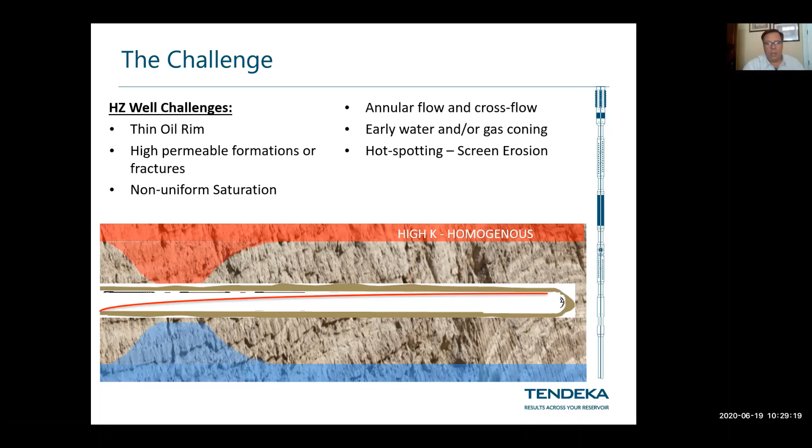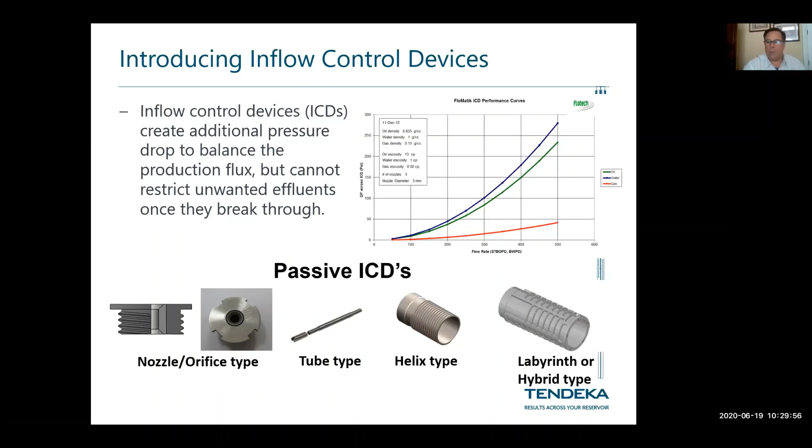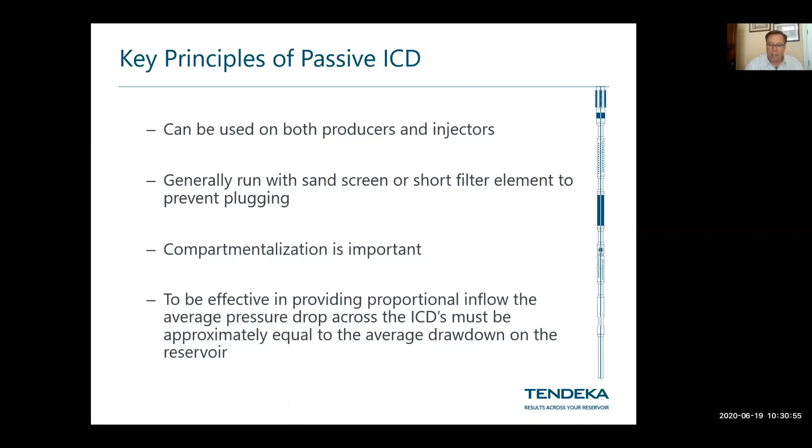So to be effective in providing proportional inflow, the average pressure drop across the ICD must be approximately equal to the average drawdown on the reservoir. That's when we talk about these passive ICDs or the nozzles. As we move into the autonomous ICDs, or the AICDs, you'll see the difference there in the two devices and technologies.

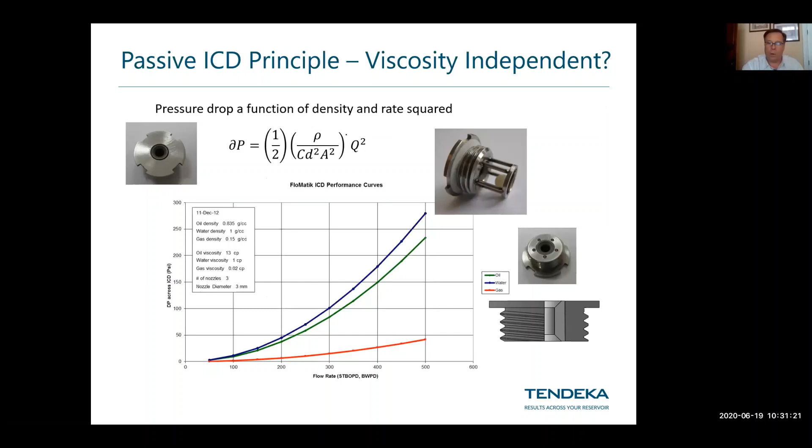So this is basically showing what this nozzle type ICD looks like, and pressure drop is a function of density and rate squared. So basically, it's just choking back through your nozzle size, and you factor that in to choke back those fluids coming in, and then hopefully create an even flow across the reservoir zone into the well.

And so the solution with passive ICDs, if one of these high K homogeneous zones, you're getting an even flow in. And so you can have a limited effect there with ICDs because you're just choking everything out. But ultimately what you're really looking for is that heterogeneous zone where you have a dominant flow area into the wellbore, and it allows you to control.

But as you see on the bottom, the key part is when that water or gas comes in, it really will just dominate the flow going into the wellbore. And what we see a lot with a lot of operators is that point, if they have high water cut, 95, 98%, they just start trying to pull on the well harder and just chasing the oil. So they increase their total liquid volume, trying to get more oil pulled up in there, but it's always a challenge because at the end of the day, whatever water or gas you produce that really is not what you're after, you have to deal with that on surface. And so it becomes kind of a time, money, and effort situation dealing with those fluids that you're not trying to get out of the ground.

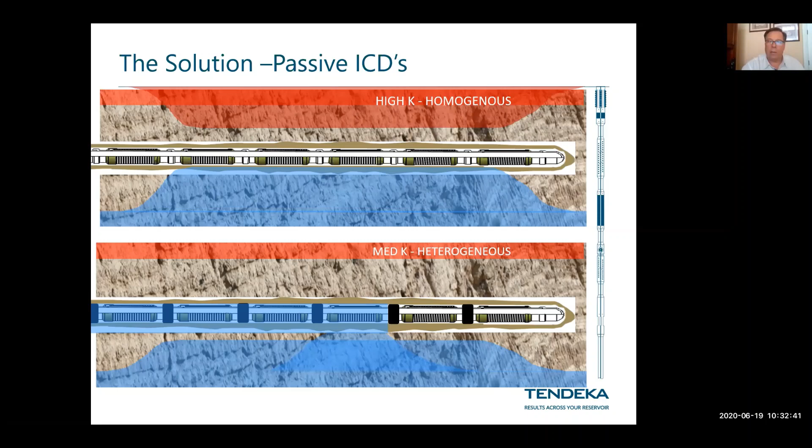If we create compartments, it allows us a little more control on this flow coming in with passive ICDs or AICDs, so you're able to control it. The fluids are not jumping over. You have a little more control, so you can get the oil out closer to the toe and the heel of the well while controlling those areas where water's breaking through.

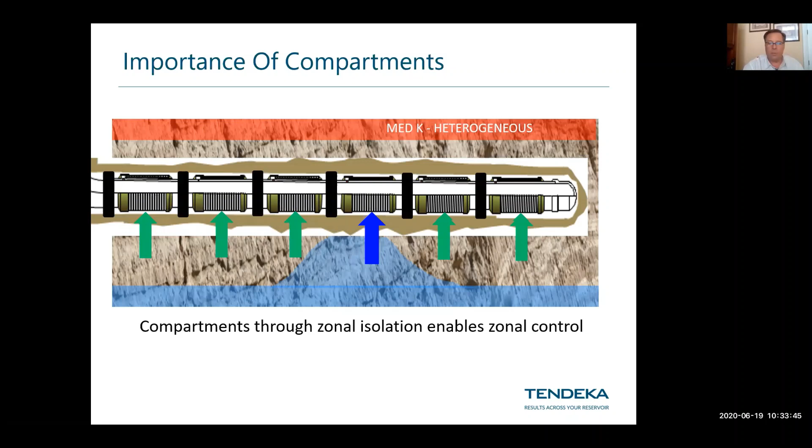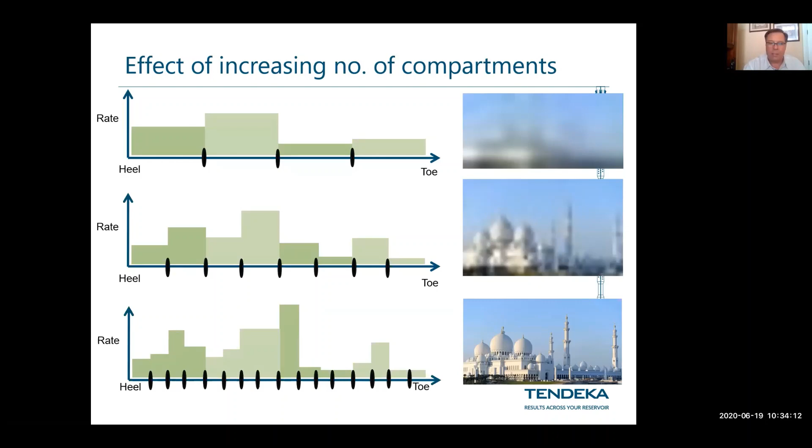So when we talk about compartments, the key is really the more compartments you add, the clearer, more focused the picture comes in. And then it also becomes a balance, because you can see at the bottom where we have several compartments in there. Sometimes it just doesn't make sense to do that. So you have to really balance it.

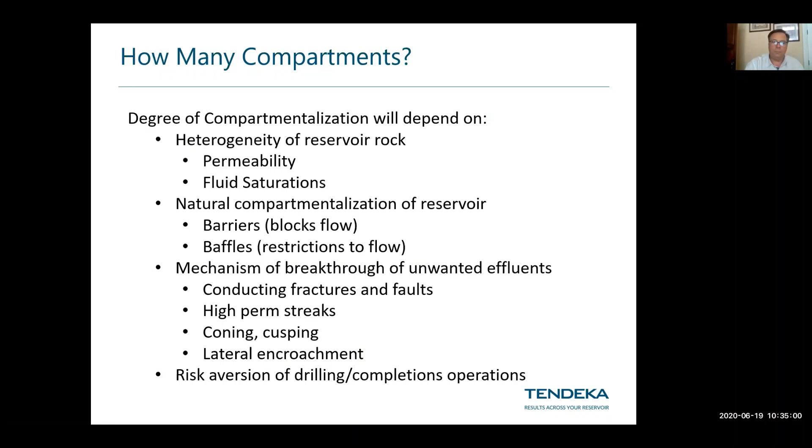Here's the caveat for ICDs, passive ICDs: those low Reynolds numbers. Once water or gas breaks through due to higher mobility in the reservoir, the ICD completions will result in higher water or gas production. So you're going to choke it back for a short period, bring the well on, allow the oil to come in. But once the water or gas gets there, there's no ability to stop that effluent from coming in. At the end of the day, it's just a small orifice, which hopefully in the front end of the well life gets a little more even production coming into the wellbore.

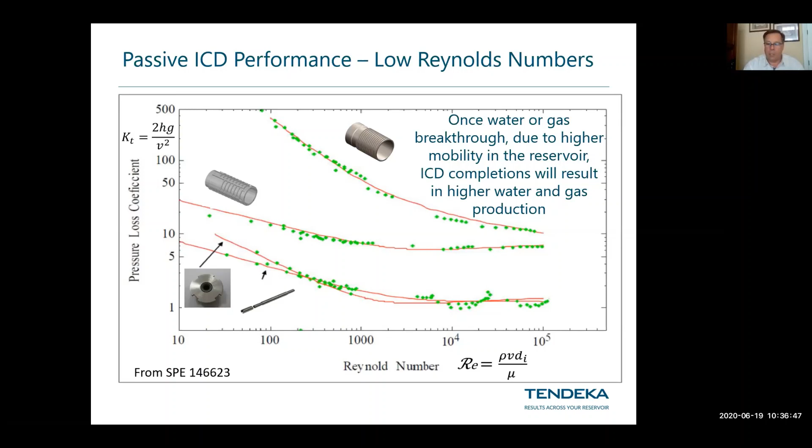The particular one I'm showing you is one of our devices, which just has a floating disc. It regulates flow of fluids, primarily used in horizontals, multilateral, other advanced well architectures. We can run them, we've run them in vertical wells as well and retrofit environments, but predominantly horizontal wells. The AICD is capable of modifying its flow control characteristics autonomously in response to fluid properties to exclude the unwanted effluents.

So that would be water or gas. This device, although it differentiates between the three fluids, is active in water or gas. So if you have a combination of those fluids coming in, it will choke them both back. We'll see a little more of that as I move on. The device demonstrates a significantly different response in pressure drop versus flow rate performance as a function of the fluid type, and we'll demonstrate that again as we go through.

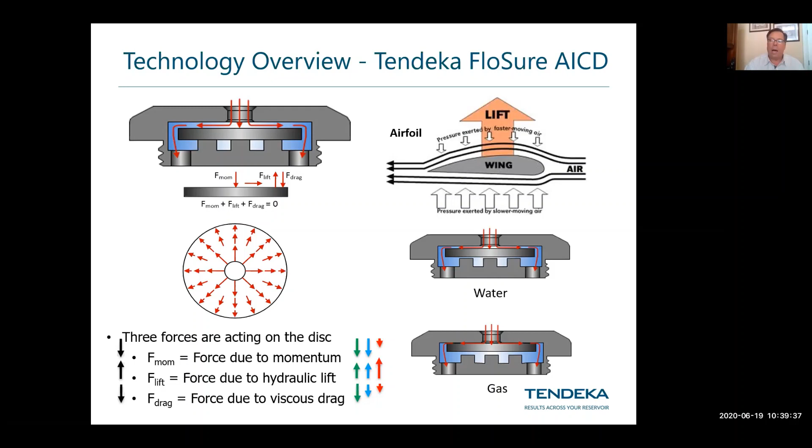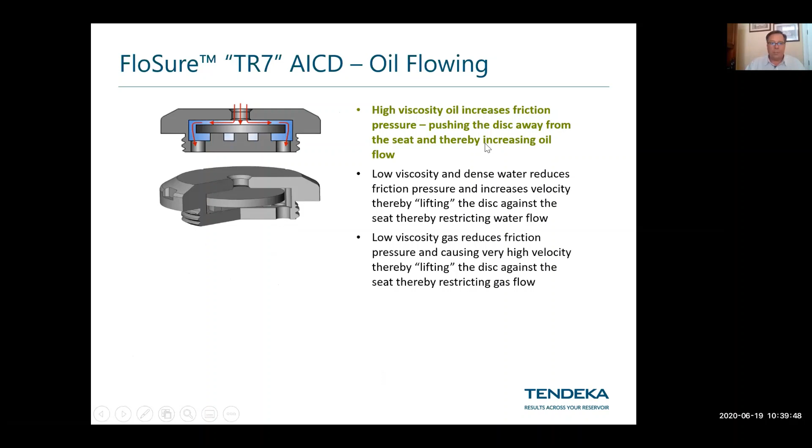When you see the picture on the top left, that's oil coming in, disc all the way down, fluid oil coming around the top of the disc and then out that shower head piece. As water or gas comes in, lower viscosity fluids, higher velocity, lift that disc. Talking about the higher viscosity fluids pushing the disc away - you can see it in the picture, disc is all the way dropped down. As the water comes in, the velocity increases and lifts the disc or moves it away from the bottom, choking back the fluid. And of course, gas will pull it back even more.

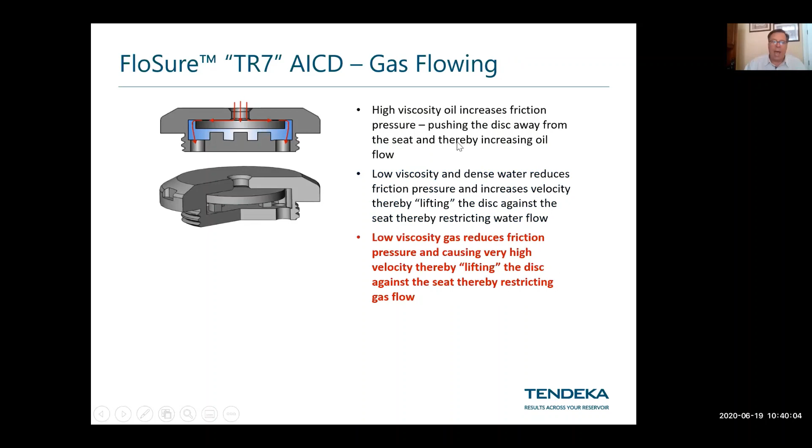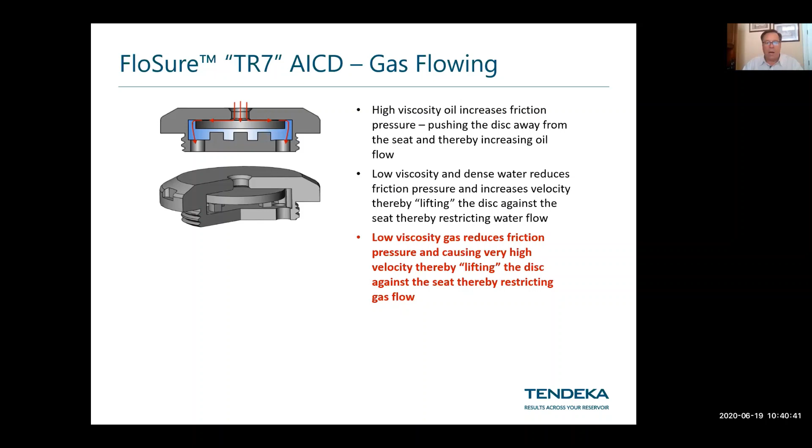We describe it as choking because this disc never fully closes. So it will still produce water or gas, but in a much limited rate to allow oil to come in through the other compartments you've created. One of the nice things about this device is that if oil works its way back around to the front of the device, then the device will go back into that production or drop-down mode and allow the oil to produce. As water or gas comes back to the valve, it'll start its choking effects again.

So just a little graph showing the single-phase testing that we've done, and again - it chokes water and gas at low viscosity, and opens for the oil at high viscosity. The thicker the oil, the easier it flows. You can see in this highlighted green area pretty much the sweet spot of the valve and how it works - there's a low differential or pressure drop across that valve as it's producing the oil and then choking back water or gas.

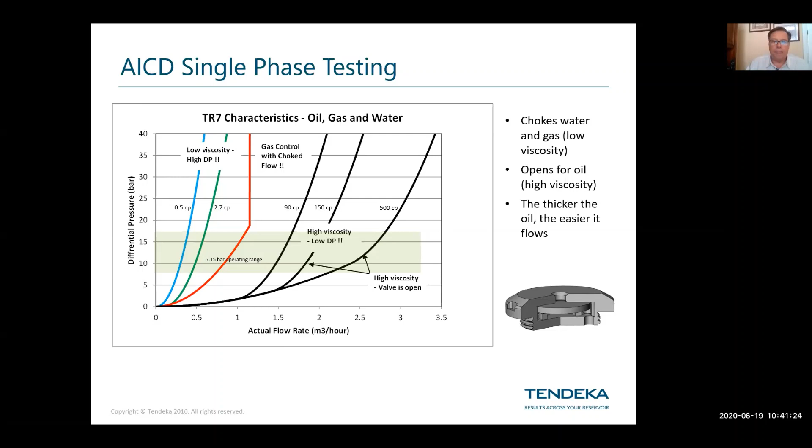Again, the beauty of all these devices is they're similarly located in screen joints, and there's a lot of flexibility in how you can run these, whether it's in a premium screen or a wire wrap screen, or we can even use shrouded joints if sand control isn't needed, and we have subs if no sand control is required. But we certainly want a debris filter at a minimum over these devices to protect them.

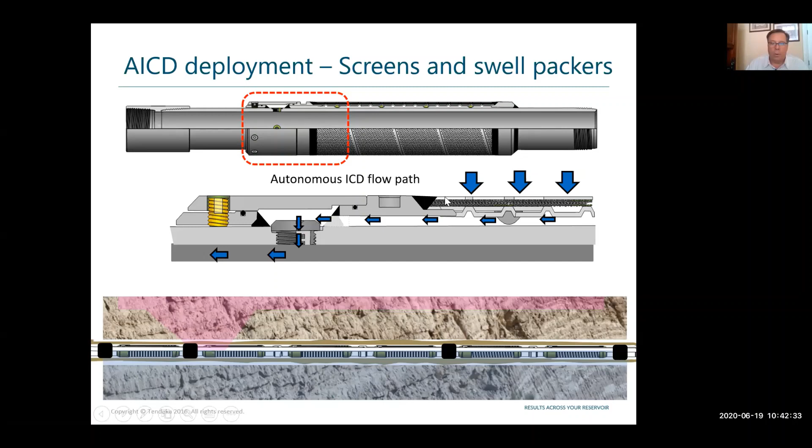So some myths and realities about AICDs: they're not downhole separators, so what comes in must go out. So whatever's coming into that well, we choke it back, hold it back, and at some point those fluids will jump across the compartments that we've created.

The idea is twofold. One, that you don't need to pull on the well as hard as previously when you're not running this technology, as we talked about, chasing that oil out at 95% water cut. Some of these operators are pulling 3,000 barrels a day to get 200 barrels of oil out. In this environment, maybe you're pulling 1,000 barrels a day and getting 400 barrels of oil out a day. So it allows you to not work the well as hard. However, at some point it's still going to water out or gas out or whatever, but the devices hopefully help you produce more oil longer and extend the life of the well.

But here's the big one: AICDs cannot change water to oil. We would probably really have something if we were able to do that. But so far, we're not able to change water to oil.

To improve oil production, there must be a variation in the oil saturation or oil cut along the length of the wellbore. So like we talked about with the homogeneous wells, if you've got even water flow or gas flow coming into the wellbore, AICDs are really not going to work, because it's just going to choke back all the way across the length of the zone. And if the whole length of the wellbore is at 90% water cut, the AICDs cannot make an improvement.

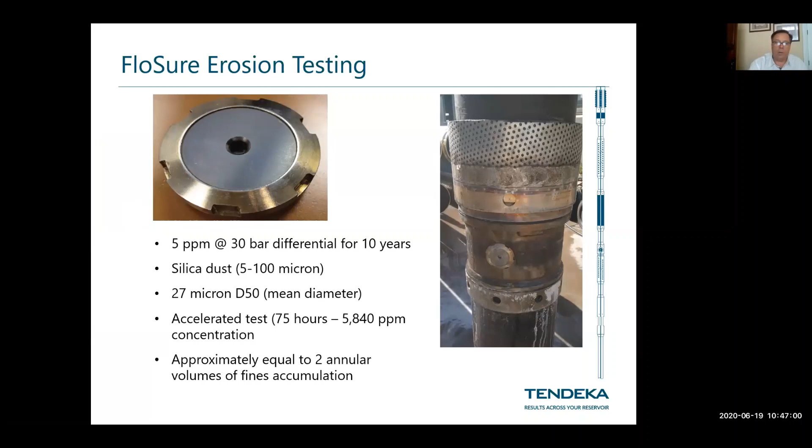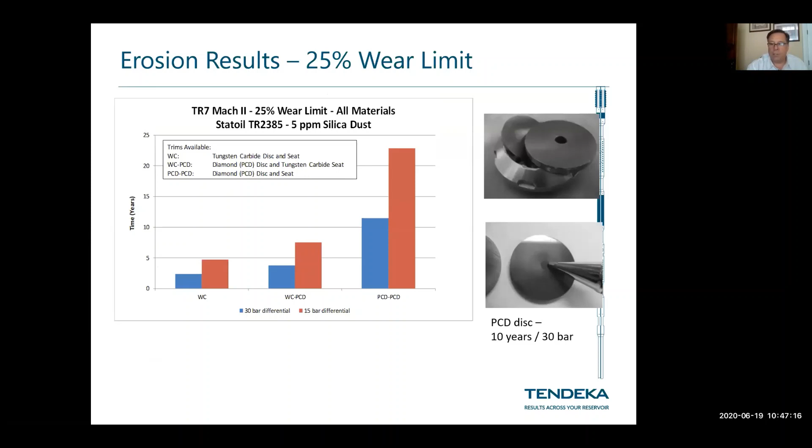So this is just quickly showing you the test, the wear limits, all the materials. This was a Statoil test with silica dust, over 10 years determined, at 30 bar, and you can see very limited wear.

Plugging is a big one because you have a lot of muds and different fluids coming in. When we look at the ports, the first thought is, wow, these entrance ports are not very big—are they susceptible to plugging? I would tell you we satisfied all the plugging tests. At one point they tried to load up the solids, trying to get the devices to plug, and they really never could get it to plug.

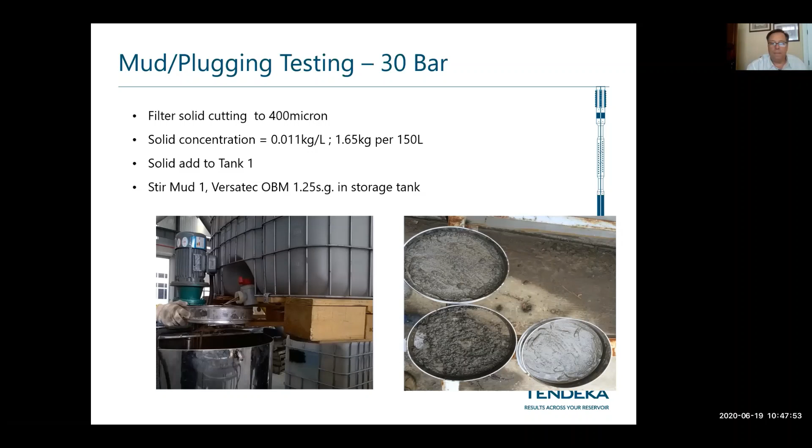Track record—just to talk about some of these. This is the Statoil Troll project, which is probably the biggest highlight of the technology. It started out as, I think, 5 originally vertical wells, and they had a thin gas cap with a thin oil layer.

They ultimately drilled horizontals into the thin oil rim, but the gas just immediately started to break through. Passive ICDs were starting to enter the industry at the time, and they employed some ICDs in these wells and did have some improved performance. They were able to hold back the gas a little longer than not doing anything, running open hole gravel packs with passive ICDs.

Then they started to employ AICDs—this jumps ahead of the story a bit, but some of the testing showed that once they developed and started running AICDs, they found the AICD wells were producing in 9 months the same as the ICD wells did in their whole life. The AICDs showed a stable production profile while the ICD branch had been choked.

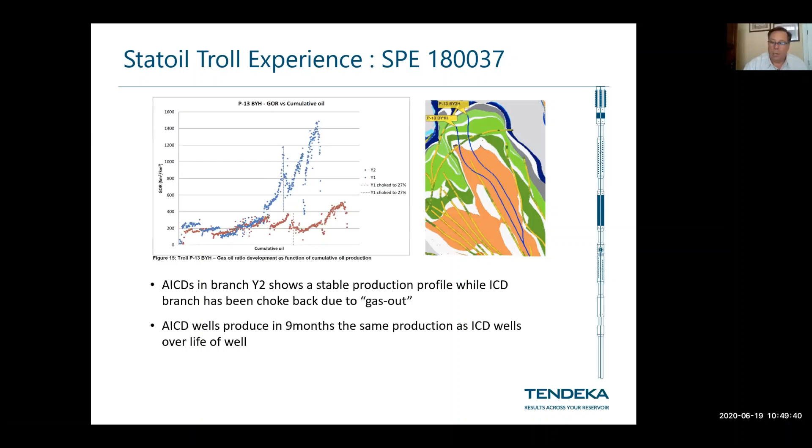So they ran some multilaterals, one AICD, one ICD, to compare the two technologies. These were SPE papers written for these projects. Following the successful trials of the AICDs, they installed them in all the Troll wells, with no additional complexity or risk to the completion or production of the well.

Everything was just as they were doing—there were no added risks run. However, the AICDs enabled the Troll wells to be produced at higher rates with longer consistency, resulting in 15 to 20% more oil production, which, as we all know, especially in this environment, is huge.

Going back to this schematic—if you remember, I talked in the beginning that they were drilling single lateral horizontals and gravel packing them. After installing AICDs and getting this even flow into the well, they weren't moving sand, weren't creating hot spots or eroding screens, and determined the AICDs were helping their sand control problem as well. So now they're drilling trilateral completions, all standalone screen, no gravel packs, all employing AICDs, and have really increased the production of the field.

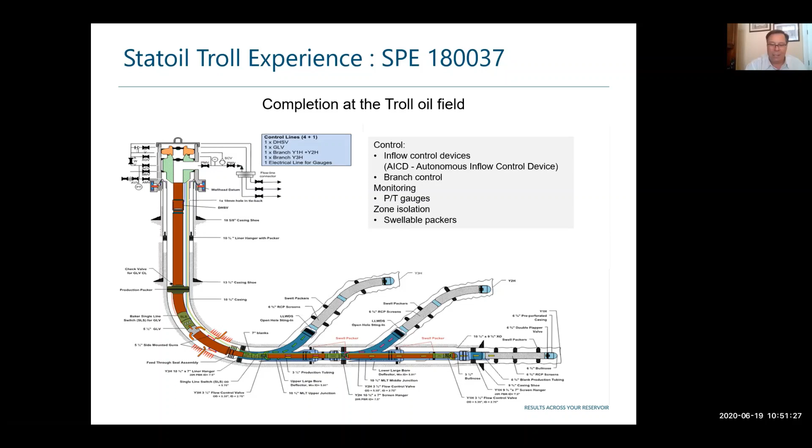This field started out as a 5-well project, and it's been going on well over 10 years now—very, very successful, a lot of it because of, in the early stages, ICDs, and then the advancement of the AICD technology.

One of the things we look at, and questions come up, is: how many devices do you run? Where do you put the compartments? How do you determine all of that? Are we just saying, hey, run 2 or 3 here, create your compartments? No, we're not doing that at all.

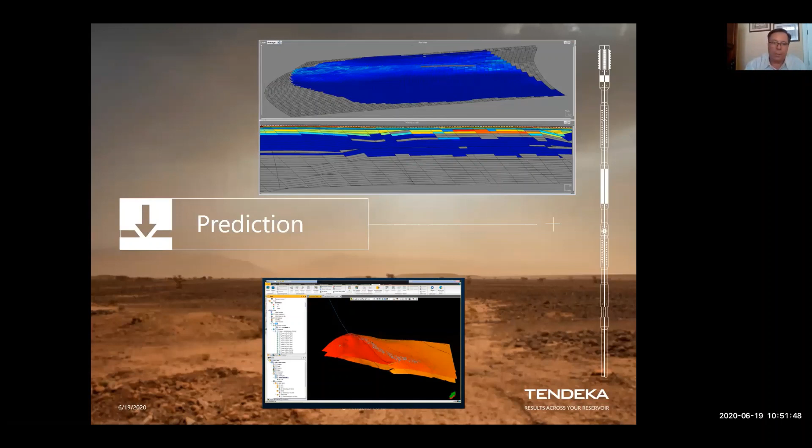So we want to look at all those well environments and the well architecture, and then we'll develop a problem statement, and we'll run all our NETool simulations and other simulations, and then create that opportunity statement and identify the solution. One of the things we do after that is sit with the customer and evaluate that, putting together a value estimation as well.

We like to look at it as, most operators want a return on that investment in 6 months. So it's great to say we can install all these devices and compartments, but if it doesn't make economic sense, then it makes no sense at all. That's part of weighing how many compartments you create versus the economics of the well. Is the squeeze worth the juice, so to speak?

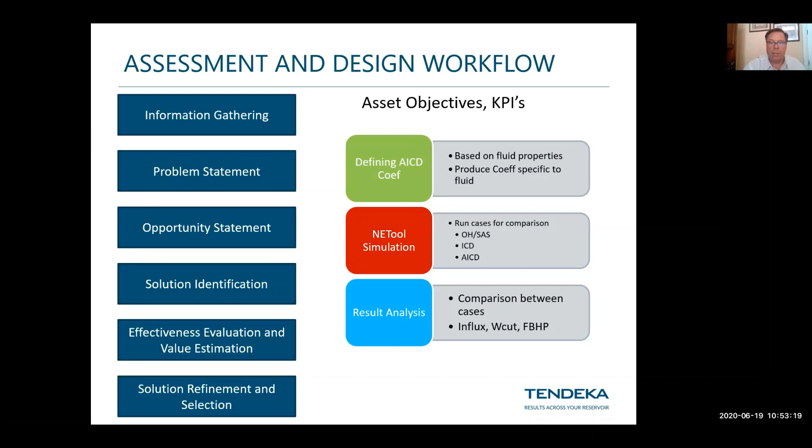And so then there's the solution refinement and selection. That's where, after meeting with the customer, the operator, we can define that and tweak it down to what makes the most sense. This is just an example of something we would do in a summary recommendation, to look at the base case.

We've had some customers tell us once the water comes in, it comes in so hard and they're chasing it, that at some point they're either cutting the screens, or if they're running slotted liners, they're cutting them, and these wells are shut in within a month. So they might not even make the life of the well that they're hoping to get.

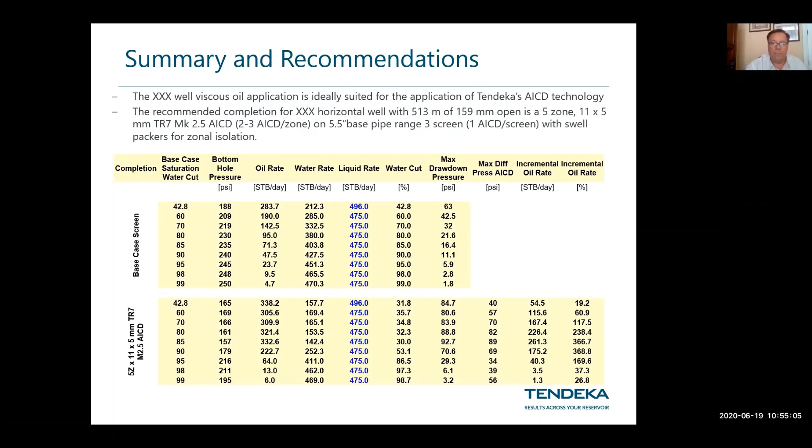So in summary, the AICDs are proven to increase oil production by controlling water and gas. The performance is fully delineated using multi-phase testing, which is used to generalize the performance and the coefficients used in commercial modeling software, like the NETool we saw. The technology is qualified for robustness during deployment and life of well operation, and we saw all of the testing done to qualify these devices.

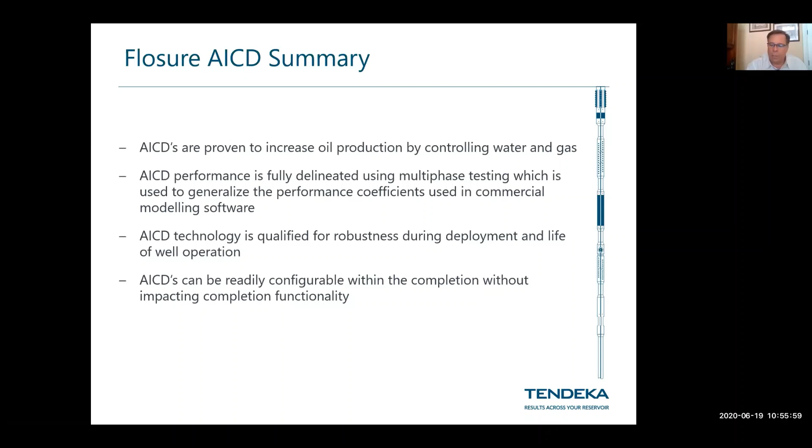It can be readily configurable within the completion without impacting completion functionality. That's key, it really doesn't increase any risk in what the operator is doing, especially if they're running standalone screens, these devices don't change that at all. You're picking them up and running them similarly to a standalone screen.

We did talk about zonal isolation, and the compartments are created, and you have some options there. That's what I like about this technology, these types of completions, you do have some flexibility and diversity on how you set up the completion.

So you can run it with standard swell packers, and in this case maybe you're running on a 20-foot joint with a 5-foot element, but you also have the ability to run these swell sleeves. I like the swell sleeves because they'll slide up over a blank joint of pipe, and you can position them anywhere you determine you need them, allowing the flexibility to make those changes on location.

Once you drill the well, if you see some washout areas, you can say I want to move my compartment up one place or another so it's more effective, or maybe that washout's longer than anticipated, so let me stack a couple of these sleeves to make sure I create that compartment. So you have some options in compartment creation with the swell products.

And then ICDs, one of the things I always recommend when we run ICDs, because these are production valves, and as we talked about, that base pipe is a blank base pipe or non-perforated base pipe.

So you only have the ability to take production in. A lot of these wells later in life will want a solvent treatment or acid treatment. So typically what we'll recommend is a bypass valve, or in our case, we call it a flow check injection valve. That allows you to pump out of these valves and into the reservoir. You're going to run one of these devices in probably every joint where you have an AICD, and we'll model whether you need 1 or 2 devices in each one. But it allows you to have the ability to pump out of the zone.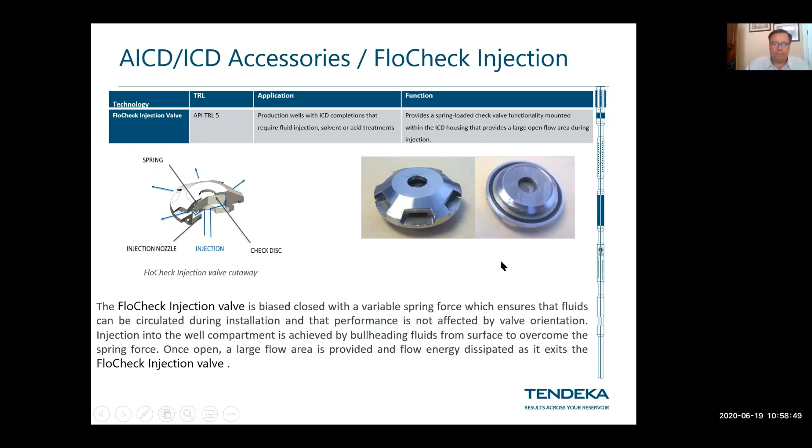Another option in the completions, as we talked about, is you can go with premium screens, direct wrap screens. You can use the debris filters if you're in a non-sand control environment and just want a shroud to go over them. We also run these, I think I mentioned, in retrofit.

With retrofits, where you have maybe a cut screen or a cut slotted liner, a lot of times what we'd like to see is if you're going to run, say, a pre-perforated liner and some swell packers to create those compartments. That'll allow you some control in the initial part of the well, but then if you need to retrofit, we can run inside of those. They lose their effectiveness if we don't have that compartmentalization out in the reservoir face. You'll get a little help, but obviously that fluid's going to jump outside the perforated pipe or screen. And then again, we've got the different subs and compartmentalization as we talked about.

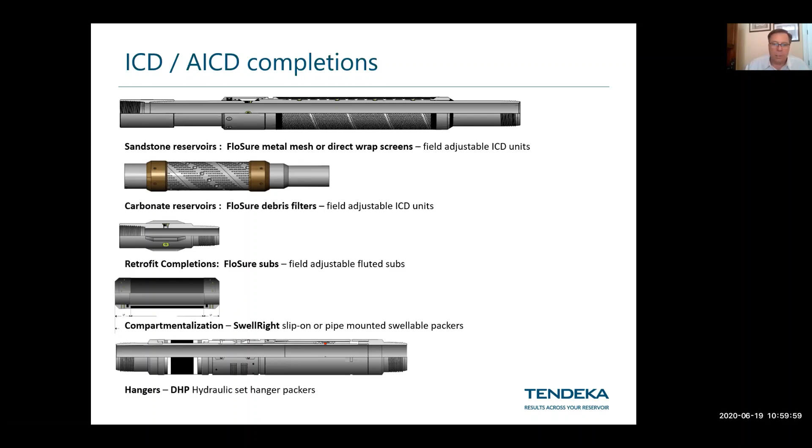This is just a quick look at what we did up in Canada with the heavy oil retrofit and these small subs. You can see that in some environments where economics are tight, and these wells in Canada weren't big producers, however, they were shut in. A lot of these wells were shut in, and this technology allowed them to put these wells back on production and get a little more life out of those wells, and a little more production, which was very beneficial to that customer.

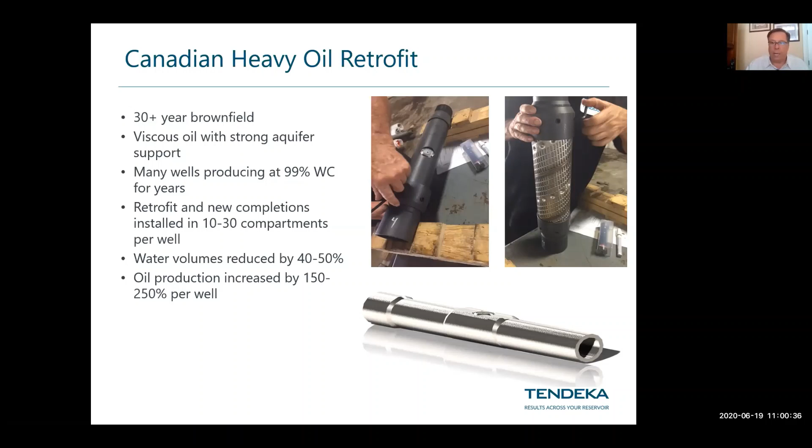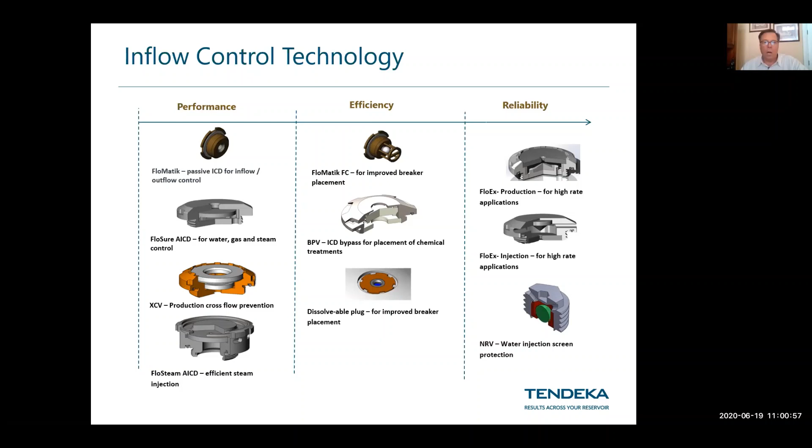Just real quick to show you that many of these devices are on the same platform, whether it's the nozzles or these disc type devices that we see. I think I have a little more time, so I'll go through another one, which is a dual choke, when we look at EOR for heavy oil and some of the cyclic steam stuff, and how these devices can benefit you there.

So just a quick example of a cyclic steam stimulation. The idea is you inject the steam into the vertical part of the well for months, so you're injecting the steam, and then you produce the well until it cools, and repeat the process. Part of the problem, as you can see here, is we have no control over where the steam goes. So the challenge is that unequal heating results in inefficient production. How do you optimize the steam distribution to get the best heating of the reservoir with variable permeability, shale barriers, perforations, etc.? And how do you allow for unrestricted oil production?

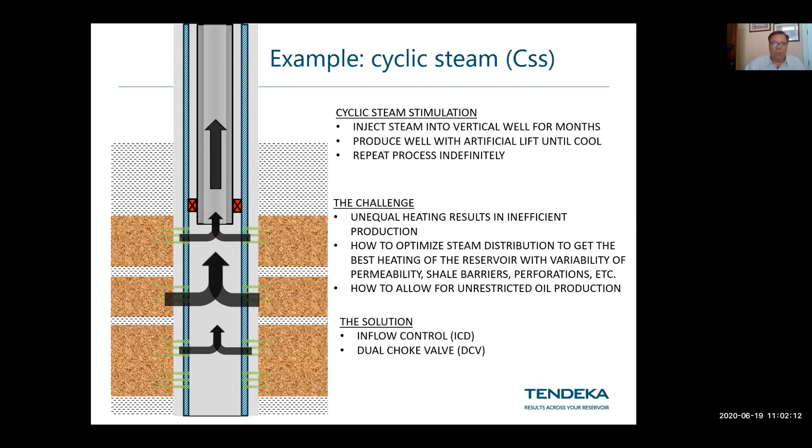So the solution is the inflow control, or dual choke. Looking at when you go into production mode after injecting that way, you can see that you get dominant production from one zone or the other, and you're really not effectively treating the reservoir or getting the production results you'd like. So in doing that, if we install these dual choke valves, it allows you to pump out and have a little control, and get even injection into the reservoir.

And conversely, you can treat it evenly. And then when you go to produce, you should get equal production out of all those zones. So you've maximized the steam injection or the steam stimulation of those zones.

And so these devices, again, you see it on that same platform. The beauty of this dual choke injection is that while injecting, you're just going through the port. You can see the disc here in the upper left depiction of it. That disc lifts up and closes off flow so that you can only come up through the center. So that's injecting out, it becomes really an ICD.

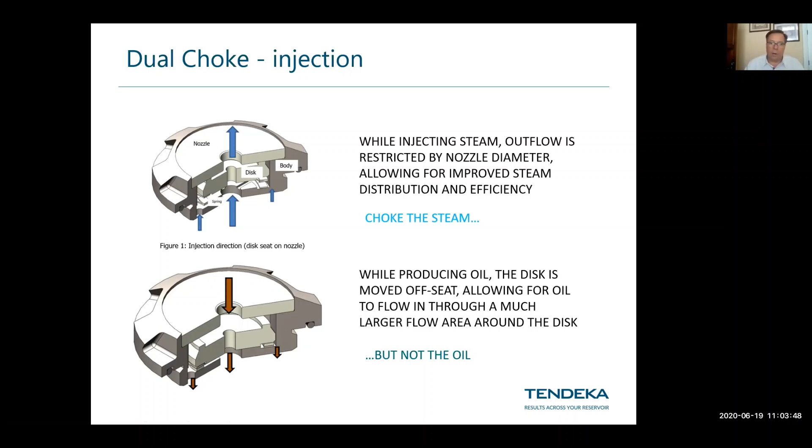And as you remember in the beginning, we talked about ICDs being used either in producers or injectors. So effectively, this device becomes an ICD for the choke injection or the steam injection portion. But when we go into production, it acts more like an AICD in the sense that the disc moves away from the port, allows the flow to come down the sides and out the bottom of that shower head device we talked about earlier, and it goes through a much larger flow area around the disc.

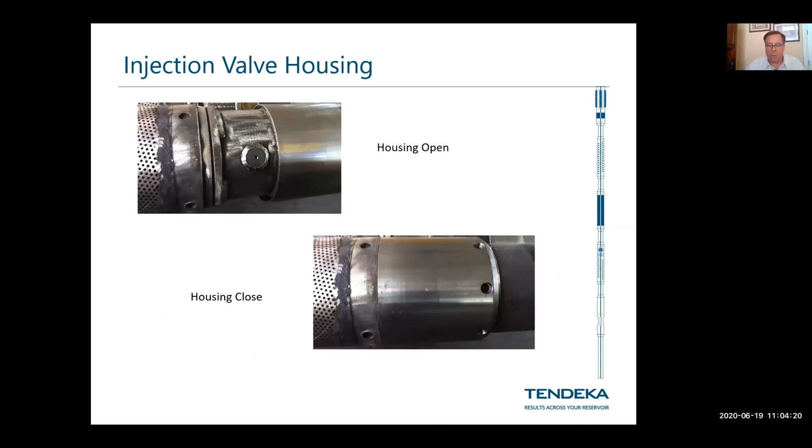Again, it shows you it's located similarly in relation to a joint that's shrouded, that the AICDs, the ICDs, the bypass valves, all of these are similar. So it really does not change what the operator is doing as far as completion, if they're running standalone screens or even if they're picking up slotted pipe and running them. Shrouded subs are not much different in doing that. And so that's all I have.

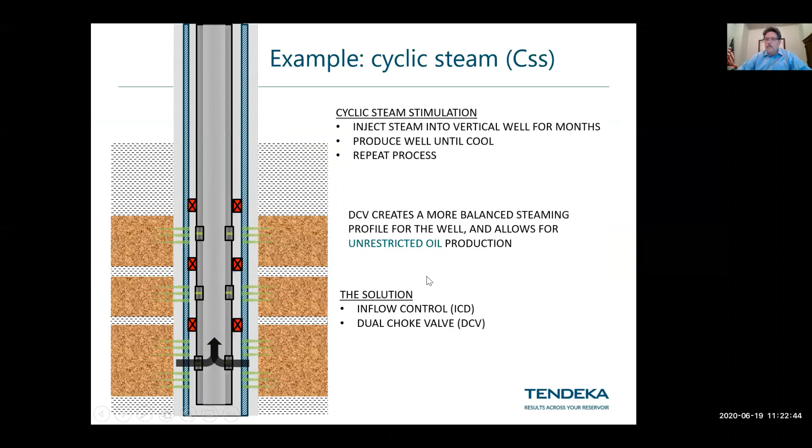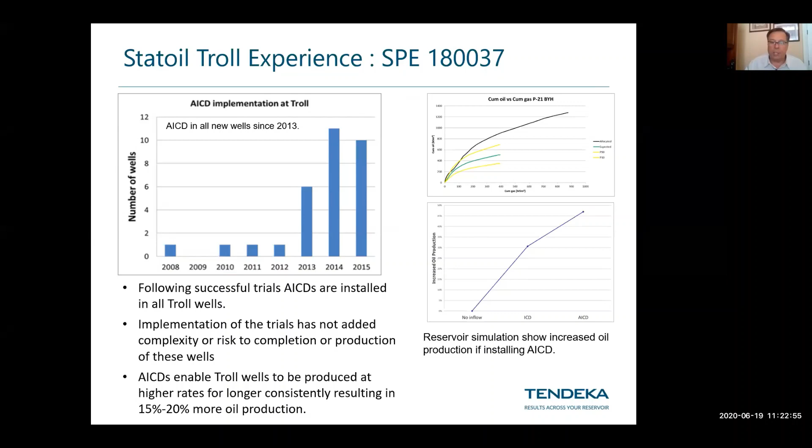The question from Miguel is, how accurate have the pre-completion simulations been versus production allocation with a PLT post job? Yeah, we've done a really good job - in fact there's a couple papers written on that. So the prediction models have really done well in proving out the modeling that we've done once we've completed the installation.

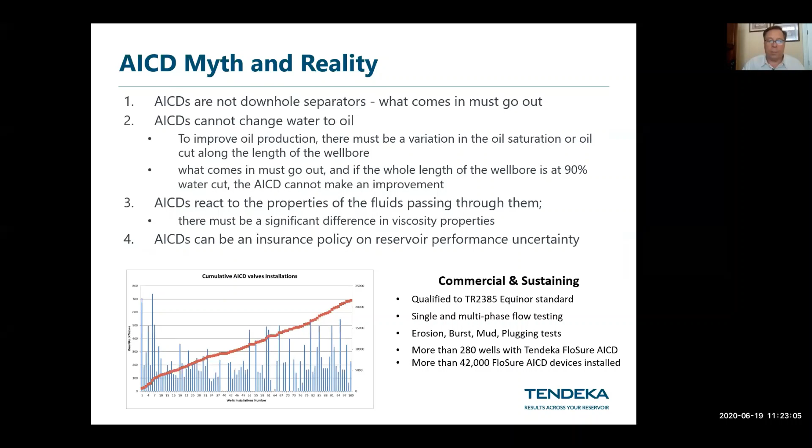Tony, you're welcome to extend on your question if you'd like. I mean, Miguel. Miguel, are you there? Yes, that answered my question. Thank you. Okay, good. Scott, is that the slide you want? Yeah, let's just use that one. That's kind of a good one, I guess.

Awesome. Yes. Well, if you have combed your hair and you're smiling, here it goes. All right. Thank you. All right.